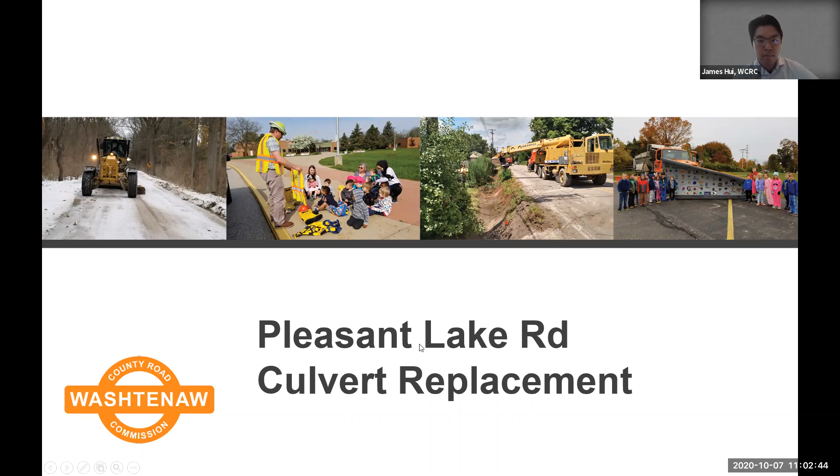So why now? The culvert itself that's there right now is deteriorating. Any further deterioration could lead to an inspection, which could lead to a potential closure. So we hope to replace it as soon as we can, which is why this project started. And we do plan on resurfacing Pleasant Lake Road from Zeeb to Ann Arbor Saline later this fall, so we plan to replace the culvert before then. Next screen.

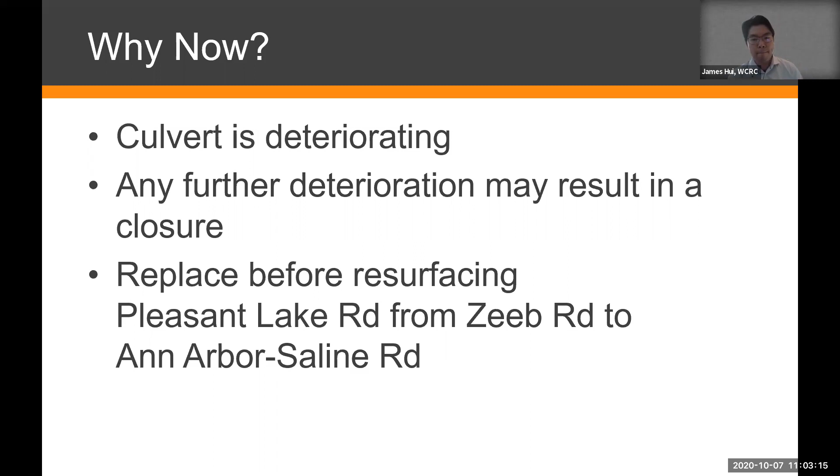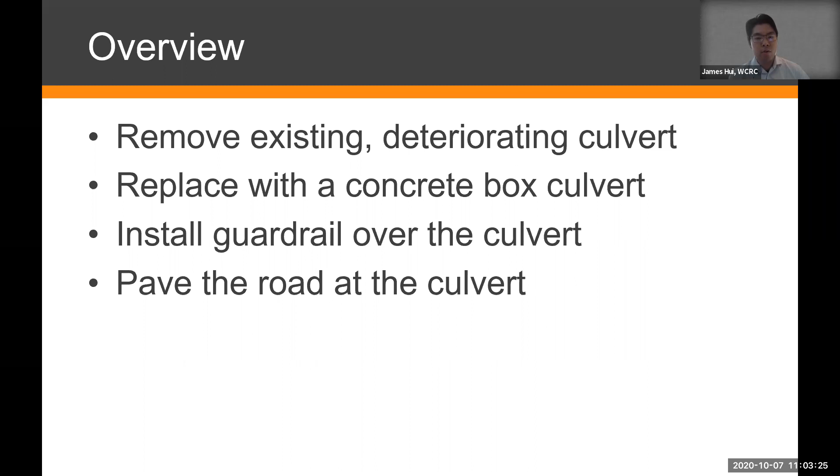So the overview: we are removing the existing culvert, replacing it with a concrete box, and then installing guardrail over the culvert and then paving the road. Next screen. So here's the location, the orange dot. This is not the culvert right in front of the Lodi Township Hall. This will be the first stream crossing, and you should see stakes out there if you drive by. Just east of Zeeb Road on Pleasant Lake. And next screen.

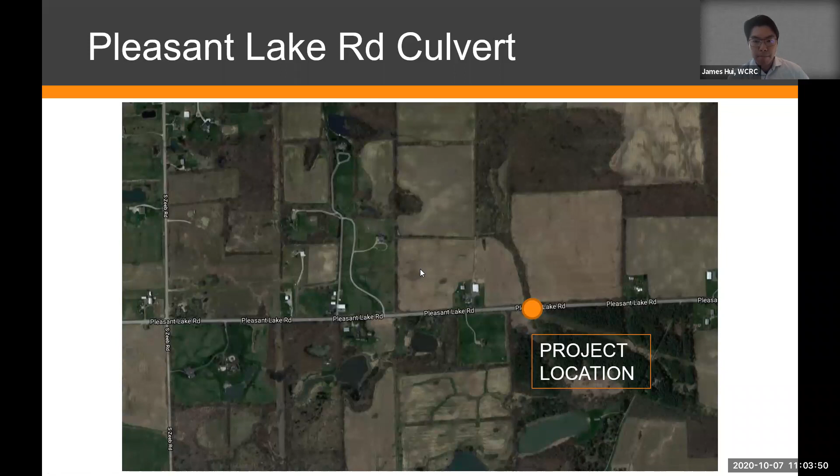So here's an example of a concrete box culvert, if you ever get to look at it from off the road. We use these a lot on our heavier traffic roads, and it's performed very well in our previous projects. So we're sticking to this design for this job, and hopefully it'll turn out really well.

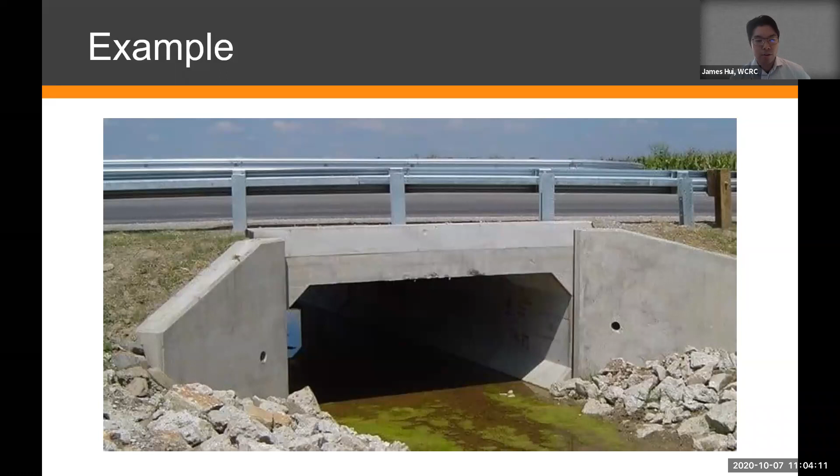Next screen. So the construction schedule: our contractor, Fonson Company Incorporated, will be starting to close the road on the 13th of October, which is next Tuesday. And they expect a 4-week construction time frame, so we expect them to be completed on or before the middle of November. Of course, this is weather dependent. With winter coming closer, we would have to make sure everything's done before the snow comes. Next screen.

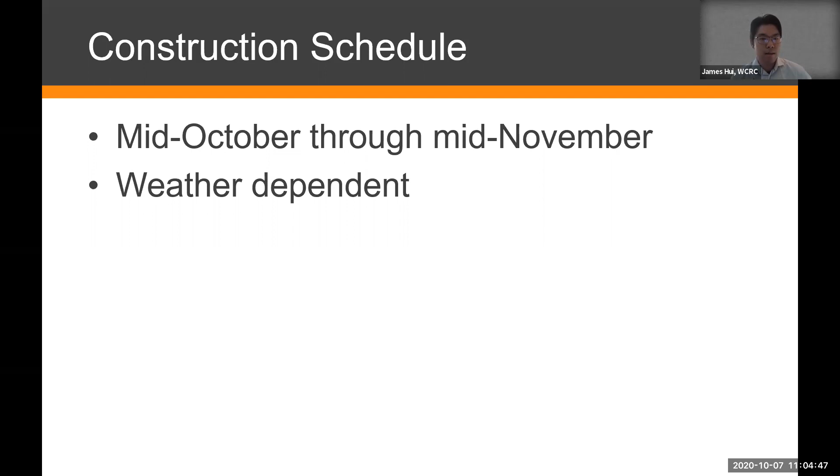Impacts to traffic. For us to replace the culvert, we do need to close that section of road completely. We do have a posted detour that would come up in the next slide. But at the time, all driveways near it, all residential areas near it will be accessible, but we will be closing the road at the culvert completely.

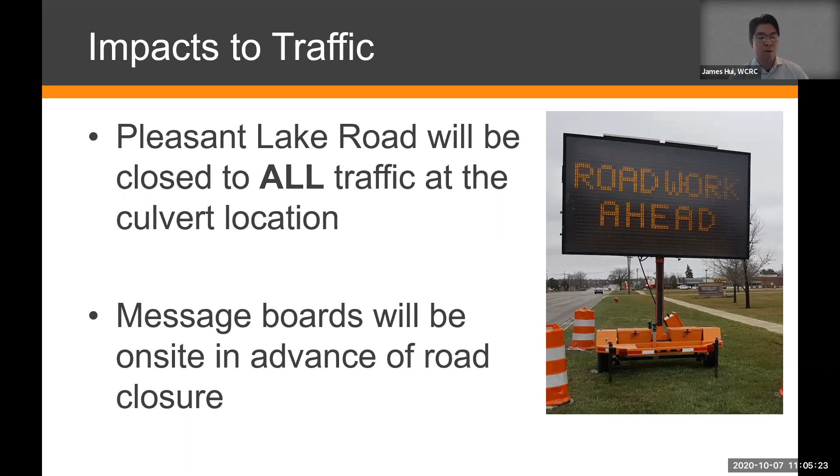And we have message boards out there right now indicating that we are having this public meeting today. And then after today, we would replace the message on there stating when the road closure is expected to start. Next screen.

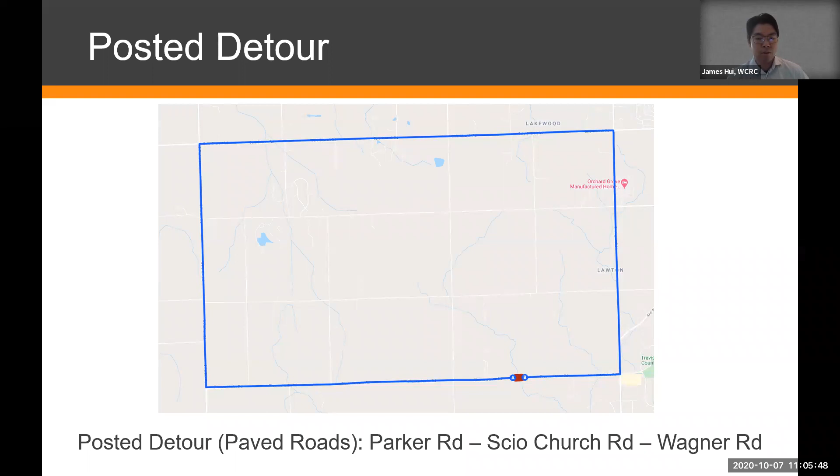So here's the posted detour for paved roads. This would be from Parker Road to Scio Church to Wagner. Again, this is just for the paved roads. If you are a resident and want to take a shorter detour, that is completely up to you, but this is our posted detour. And again, that is Parker Road to Scio Church to Wagner. Next screen.

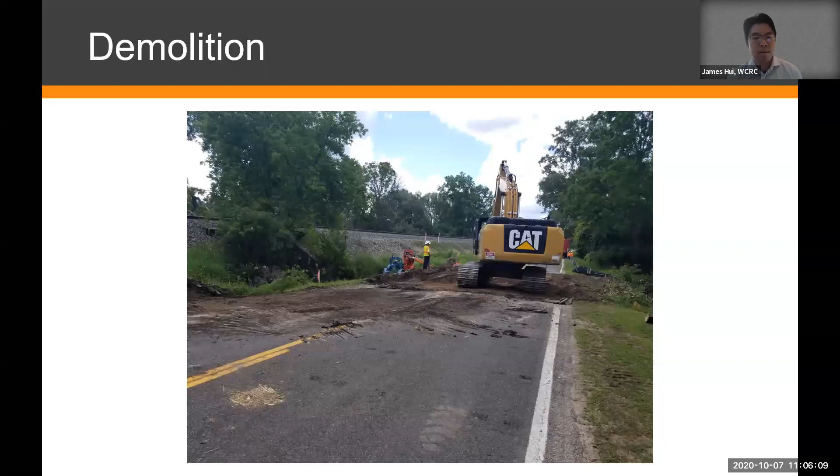So here's another quick example of what it might look like when we start. The contractor would have to start removing the road, and then either demoing the existing culvert or just pulling out the existing culvert. Next screen. This is what our box culverts typically look like. They ship in by pieces, and the contractor will have to prepare the base of the stream and then piece by piece connect the culvert together. Next screen.

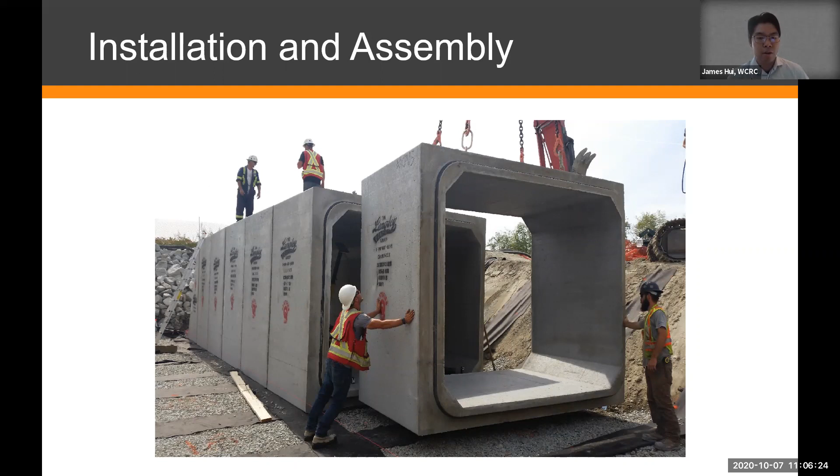And I have a couple of other items, James, if I can jump in just briefly. Sure. Excellent overview of the project, James. I very much appreciate that. Again, I'm Aaron Burkholtz. I'm a senior project manager here at the Road Commission. I work with James here in the construction and design unit. And he had brought up earlier on in his presentation the timing of this project.

Earlier in 2020, the Road Commission Permits Unit had worked with Stoneco, one of the aggregate producers, further west on Pleasant Lake Road. And through an agreement with Stoneco, we were able to resurface Pleasant Lake Road from Steinbach Road all the way to Ann Arbor Saline Road. And then we extended that further. We went through the new intersection at Ann Arbor Saline Road and Wagner Road, and all the way up to Ann Arbor Saline Road and Maple Road. So again, that work was performed under an agreement with Stoneco, that resurfacing work.

Part of the burden for the cost was on Stoneco, and part of the burden for that resurfacing cost was on the Road Commission. The timing was such that we coordinated internally with our operations department, who's overseeing that asphalt resurfacing work, and we investigated the culverts under Pleasant Lake Road. We wanted to make sure that we had a good understanding of those culvert conditions, so as to try to accomplish work ahead of the resurfacing.

And from there we talk and we discuss and we determine the size of the culvert based on the stream width, the bank full width of the stream that's crossing through there right now. And that is where we get the span, which is the width of the culvert. And then the height itself is just based on how high the floodplain could be. So we base that off of our discussion with EGLE as well. Is there any flooding upstream from this culvert?

As far as we are aware, we don't have any flooding observed. And with this new culvert, it should improve any situations upstream if there were flooding. Was there any discussions with the property owners about any flooding or any other issues they might have had with the culvert? Typically, if we don't require any right-of-way work, we don't reach out to the property owners, and there weren't any homes in the vicinity of the job. But typically, if they do come out and talk to us, we do talk to them about that, but not for this job in specific.

Aaron, you mentioned that the structure was determined to be functionally obsolete. Could you just explain a little bit about what that term means? Yeah, essentially, a functionally obsolete structure is a structure that, due to the geometrics of the road crossing, does not satisfy current traffic needs. An example would be a structure that is too narrow for the road that's crossing over it.